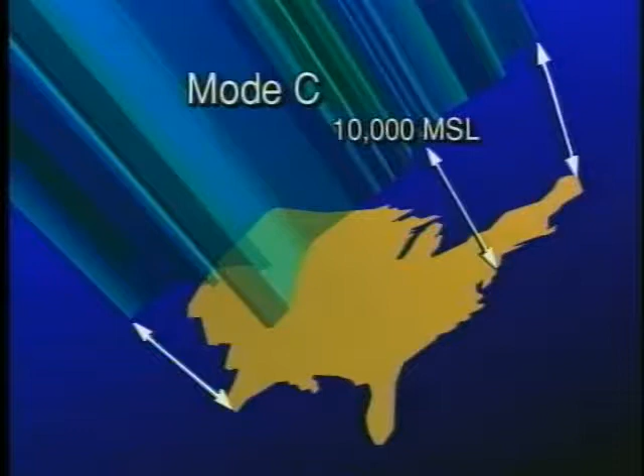You are also required to have a transponder with Mode C altitude encoding capability anytime you are flying at or above 10,000 feet mean sea level. This, however, excludes the airspace at and below 2,500 feet above ground level. The use of this equipment will be discussed in a later program.

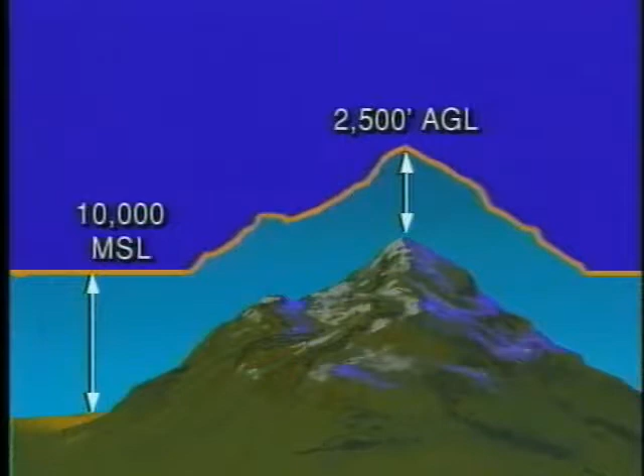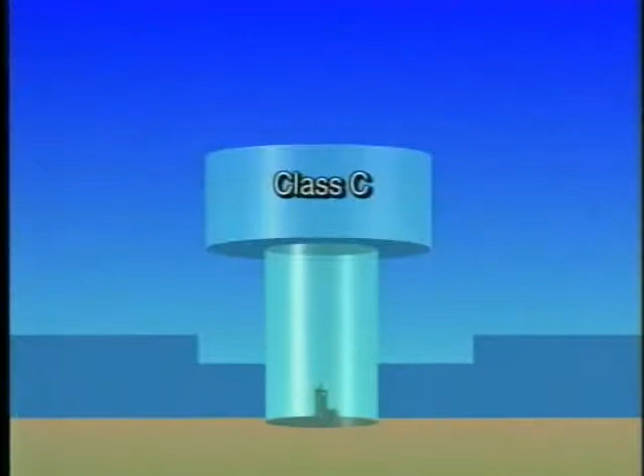Controlled and uncontrolled airspace is classified using alphabetical designations based on the standards set forth by the International Civil Aviation Organization, commonly referred to as ICAO. Controlled airspace consists of those areas designated as Class A, B, C, D, and E airspace. Uncontrolled airspace is designated as Class G. Currently, there isn't any airspace in the U.S. meeting the ICAO definition for Class F.

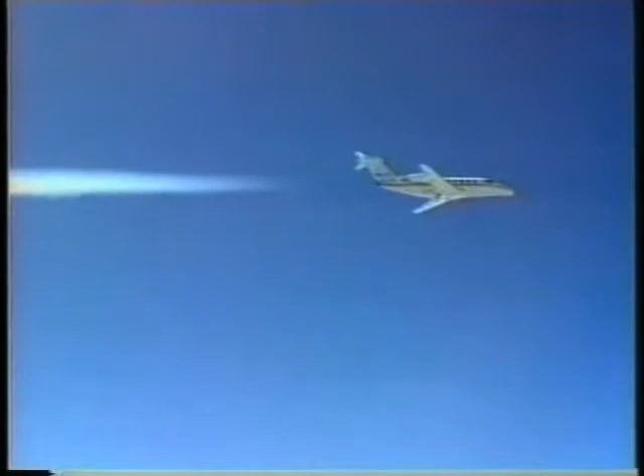The classification of airspace is relative to the complexity of the operational requirements placed on the pilot and aircraft. With this in mind, let's take a look at Class A airspace. Class A airspace extends from 18,000 feet MSL up to and including 60,000 feet MSL. To fly in Class A airspace, you must hold an instrument rating, operate under an IFR flight plan, and be controlled directly by ATC.

Now let's discuss the classes of airspace that you'll become familiar with while flying under visual flight rules. VFR sectional charts can be used to identify the various classes of airspace you will be flying in. The specific dimensions of most of the airspace classes are depicted on these charts.

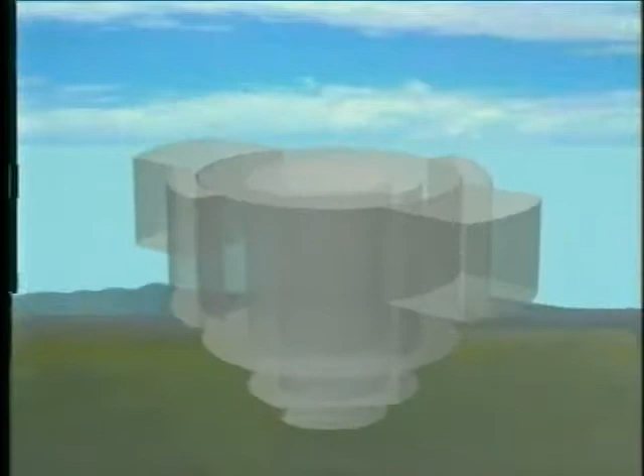Class B airspace surrounds our nation's busiest airports. In Class B airspace, radar services are provided by ATC to separate all arriving and departing traffic. Although the shape of Class B airspace may vary to meet the specific needs of each location, the general design is a series of expanding layers. This shape allows arriving and departing airplanes to remain in controlled airspace as they travel between the airport and en route portion of the flight.

To operate within Class B airspace, there are specific requirements that must be met. Prior to entering the airspace, you must get an authorization or clearance from ATC. This means your aircraft must be equipped with a two-way radio so you can communicate with ATC. In addition, your aircraft must have a transponder with Mode C altitude encoding capability. The transponder requirement extends out to 30 nautical miles from the primary airport and covers the airspace from the surface up to 10,000 feet MSL.

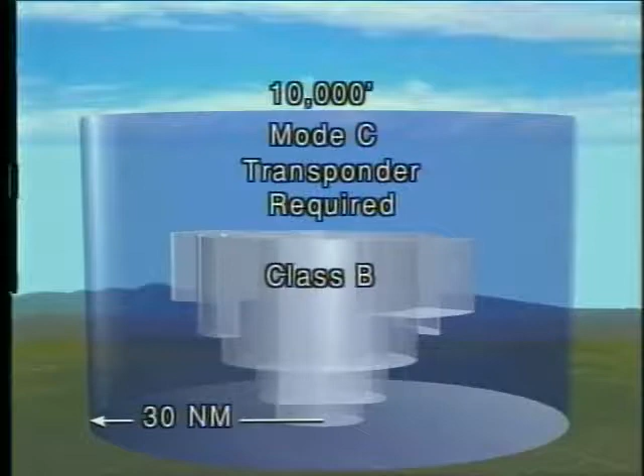To operate within Class B airspace, you must hold at least a private pilot certificate. There is, however, one exception to this regulation. Student pilots may operate within Class B airspace if they first comply with the training requirements listed in the regulations and have the appropriate instructor endorsement. Keep in mind that some Class B primary airports are so congested that takeoffs and landings by student pilots are prohibited. These airports are listed in FAR Part 91 and in the AIM.

Class C airspace exists at designated airports where the volume of traffic is not as great as in Class B airspace. But ATC does provide radar services to all aircraft.

This airspace usually consists of a core area or inner circle extending out 5 nautical miles from the primary airport, and a shelf area or outer circle with a 10-mile radius. The core area begins at the surface, while the shelf area starts at 1,200 feet AGL. Both have an upper limit of 4,000 feet above the airport elevation.

Prior to entering Class C airspace, you must establish two-way communications with ATC and maintain radio contact while in the airspace. Your aircraft must also be equipped with an operable transponder with Mode C capability. This requirement extends up to 10,000 feet MSL.

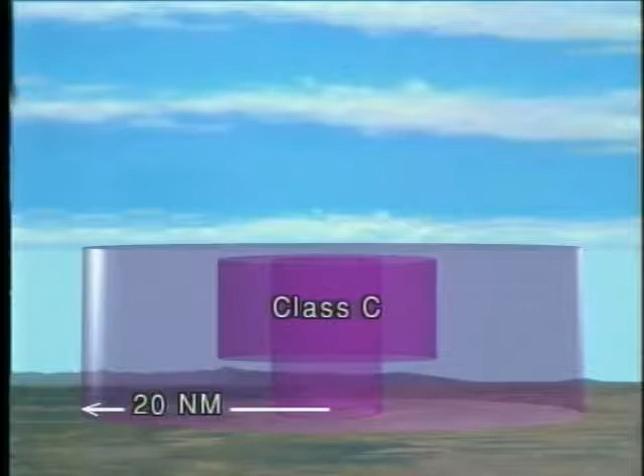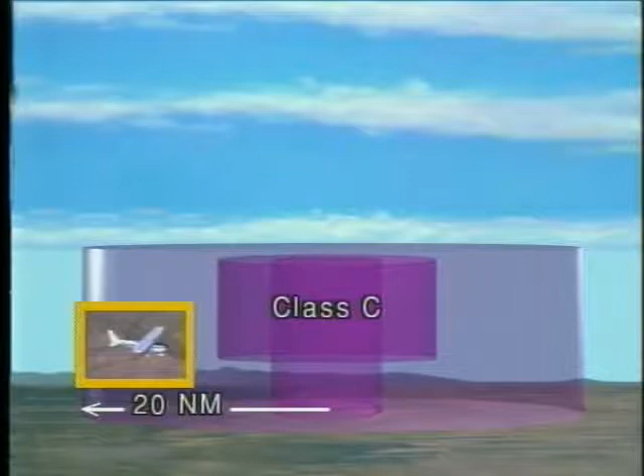An outer area exists out to 20 nautical miles from the primary airport in association with Class C airspace. Although two-way radio communications are not required, inbound VFR pilots are strongly encouraged to contact ATC when flying in the 20-mile outer area. ATC normally provides radar services in this area to improve safety and aircraft separation.

Another classification you need to know is Class D airspace. Class D airspace is located around airports that have operating control towers. The control tower provides air traffic control and weather reporting services to arriving and departing aircraft in the terminal area. The lateral dimensions of Class D airspace are normally based on the instrument approach procedures at the airport. Since this airspace often contains arrival extensions, the lateral limits vary from airport to airport.

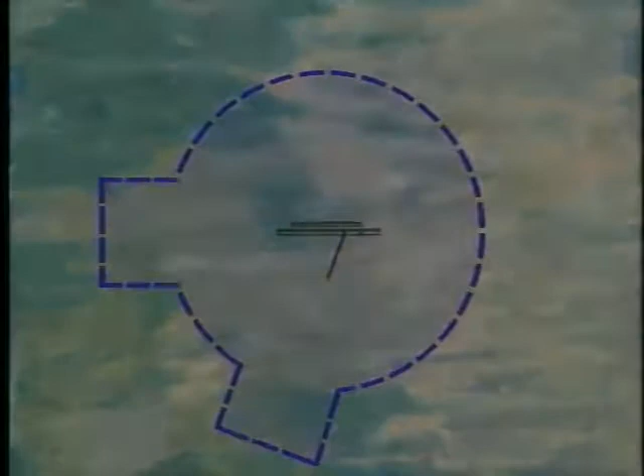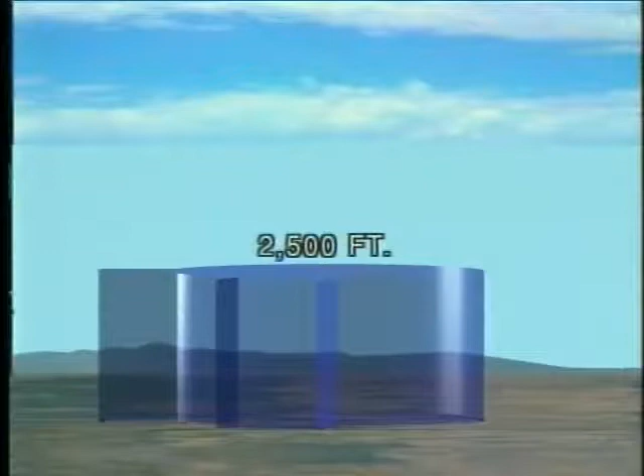Normally, the ceiling of Class D airspace is 2,500 feet above the airport elevation. The ceiling may vary, though, due to requirements unique to each airport. Prior to entering Class D airspace, you must establish and maintain two-way radio communications with the control tower.

At airports where the control tower is only operational at certain times, the airspace will be designated as Class D only when the tower is open. When the tower is not in operation, this area is referred to as Class E airspace. If there is no observer on the field to provide weather reporting service, the airspace will be designated as Class G. Two-way radio communications with ATC are not required in either Class E or Class G airspace for VFR flights.

However, in those Class E and Class G airspace areas which have an operating control tower, you must communicate with the tower when you are within 4 nautical miles and at or below 2,500 feet AGL. There are also some airports where the instrument arrival extension does not require establishing radio contact with the control tower. In this case, the extension area is designated as Class E airspace.

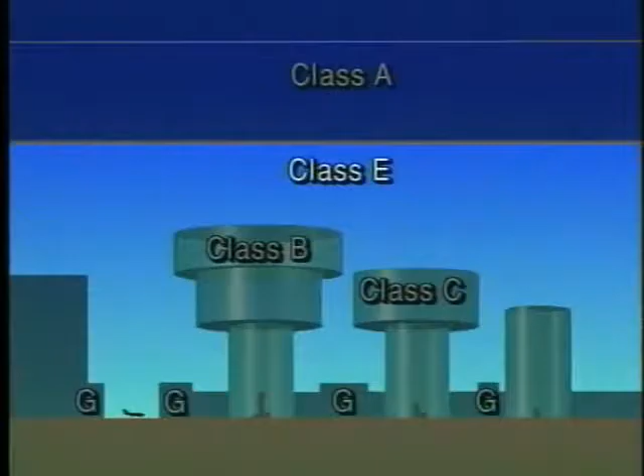The Class E designation also covers the remaining controlled airspace and consists of several different segments. ATC services are provided to IFR traffic in Class E, and some services are available on request for VFR flights. One segment of Class E airspace is found around non-towered airports which have approved instrument approach procedures. The purpose of this area is to allow IFR traffic to remain in controlled airspace while transitioning from the en route environment to the airport.

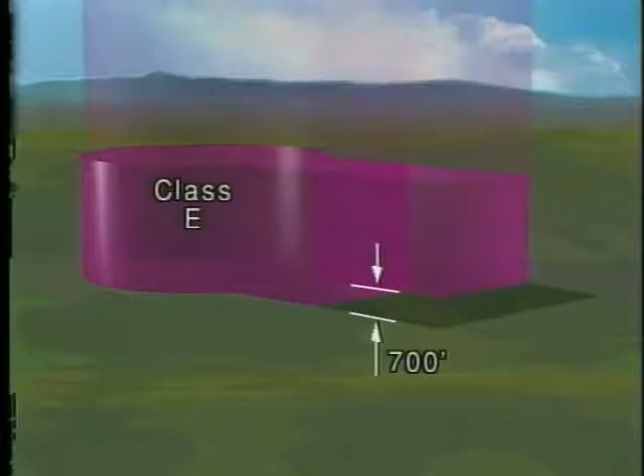The base of this type of Class E airspace begins either at the surface or at 700 feet AGL. The lateral limits may vary and are depicted on sectional charts. In both cases, the vertical limit extends upward to the base of the overlying airspace. At airports where Class E airspace begins at the surface, weather reporting services are provided by an FAA-designated weather observer. At certain times, this service may not be available, and the airspace will then be designated as Class G.

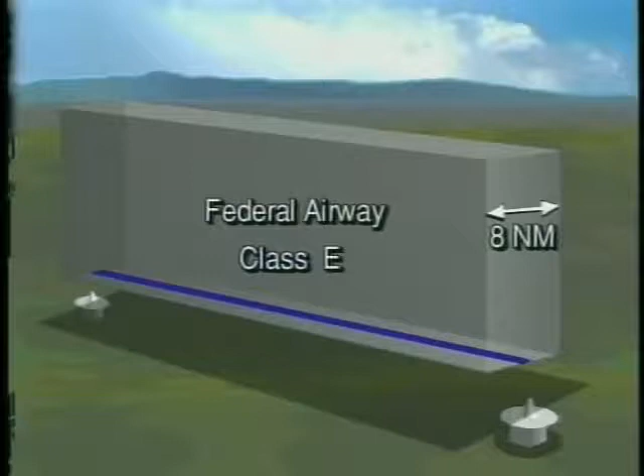Away from airports, much of the Class E airspace begins at 1,200 feet AGL, and most of your flights will be conducted in this airspace. Federal Airways, also known as Victor Airways, are designated as Class E airspace. These airways allow you to fly from one location to another by radio navigation. These airways are normally 8 nautical miles wide and begin at 1,200 feet AGL. The low-altitude airway system includes the airspace up to, but not including, 18,000 feet MSL.

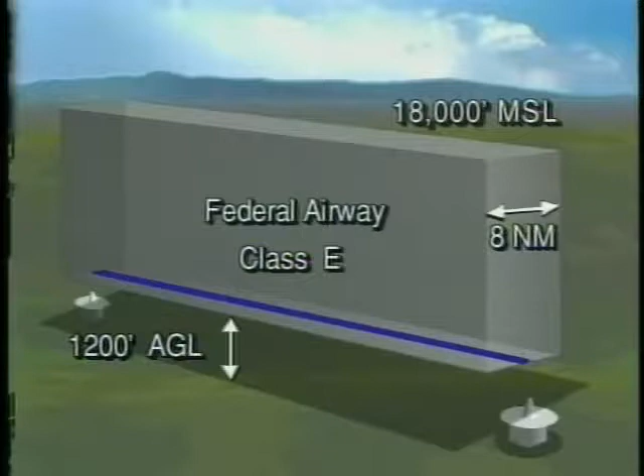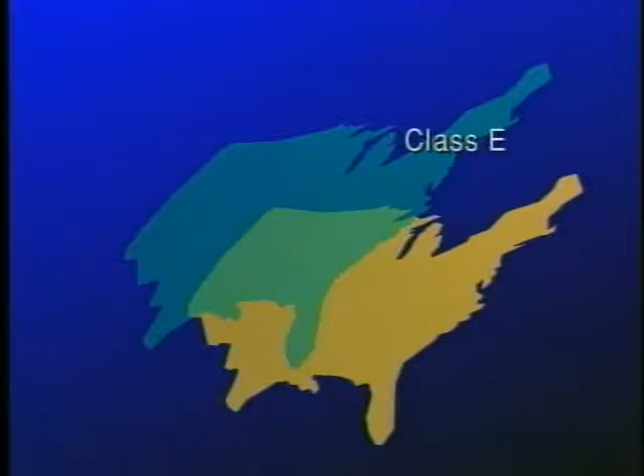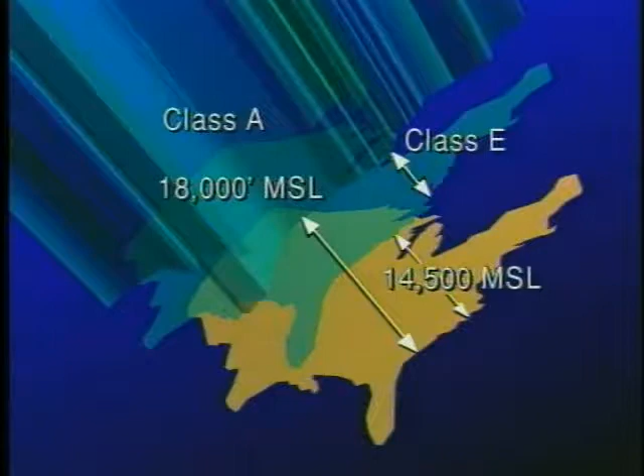Unless designated at a lower altitude, Class E airspace also covers the 48 contiguous states, the District of Columbia, and a portion of Alaska, beginning at 14,500 feet MSL and ending at the base of Class A airspace. It does not, however, include the airspace within 1,500 feet of the surface.

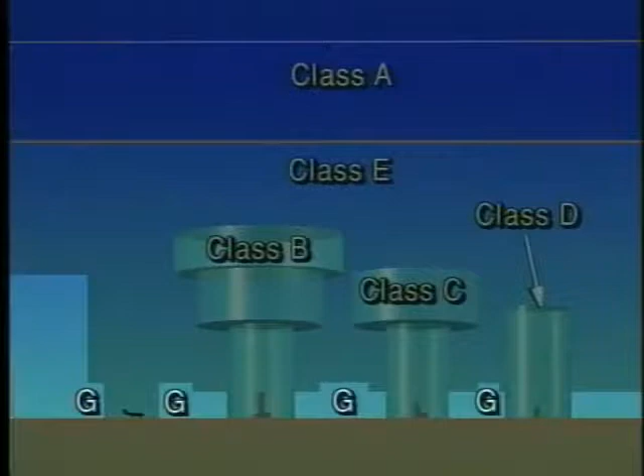The last letter designation for U.S. airspace is Class G, or uncontrolled airspace. Essentially, all airspace not designated as Class A, B, C, D, or E is uncontrolled. ATC doesn't have any responsibility or authority for aircraft operations in Class G airspace, and unless the area contains an operating control tower, there are no two-way radio communications or special equipment requirements.

Although some segments of airspace we have discussed do not require communication or special equipment, it is still important to know their dimensions because of required weather minimums. Specific cloud clearance and visibility minimums have been established for VFR flights in both controlled and uncontrolled airspace classes. Let's take a look at controlled airspace weather minimums first.

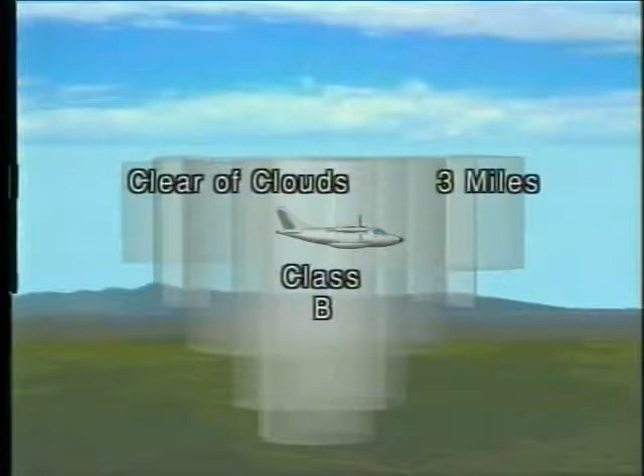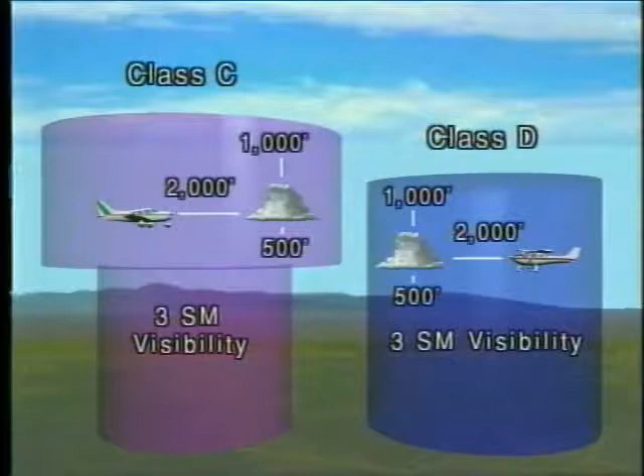To operate VFR in Class B airspace, you must remain clear of clouds and maintain at least 3 statute miles flight visibility. You must also maintain 3 statute miles visibility in Class C and D airspace, but the cloud clearance increases to 500 feet below, 1,000 feet above, and 2,000 feet horizontally. These same minimums apply in Class E airspace below 10,000 feet MSL.

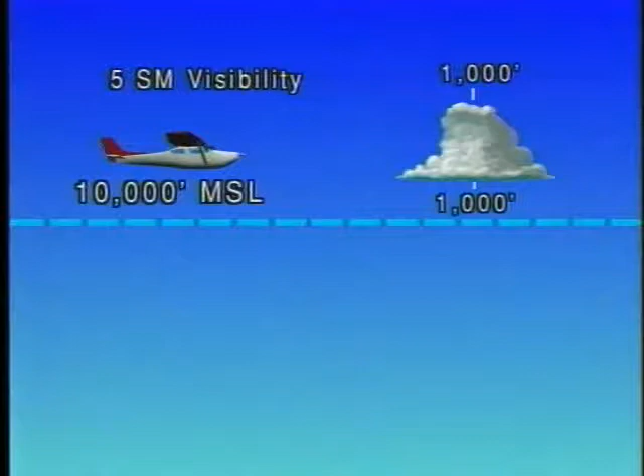In Class E airspace above 10,000 feet MSL, though, the minimums increase. You must maintain 5 statute miles flight visibility and maintain a distance from clouds of 1,000 feet below, 1,000 feet above, and 1 statute mile horizontally.

Besides the basic VFR weather minimums, there are additional limitations when operating in the vicinity of an airport in controlled airspace. For example, to operate VFR beneath a ceiling within the lateral boundaries of controlled airspace, which extends to the surface, the ceiling must be at least 1,000 feet.

In addition, within the lateral boundaries of the surface areas of Class B, C, D, and E airspace, VFR pilots cannot land, take off, or enter an airport's traffic pattern unless the visibility is 3 statute miles or better. These requirements give VFR and IFR pilots the necessary visibility to see and avoid each other during approaches and departures.

When the weather is below these VFR minimums, you may be able to obtain a special VFR clearance from ATC. This type of clearance allows you to take off and land as long as you have 1 mile visibility and can remain clear of clouds. Keep in mind, a special VFR clearance cannot be issued at night unless you have a current instrument rating and your airplane is equipped for instrument flight.

In addition, special VFR clearances are not issued to fixed-wing aircraft during the day or night at some of the nation's busier airports. A listing of these airports can be found in FAR Part 91.

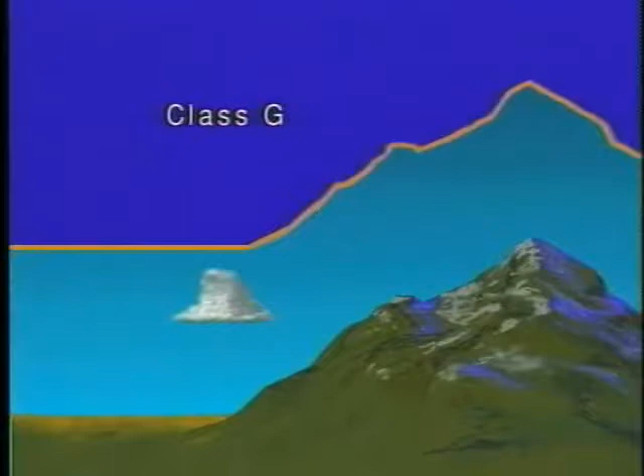The lowest weather minimums occur in Class G, uncontrolled airspace, during the day. When flying at or below 1,200 feet AGL, regardless of your MSL altitude, you must maintain a flight visibility of 1 statute mile and remain clear of clouds.

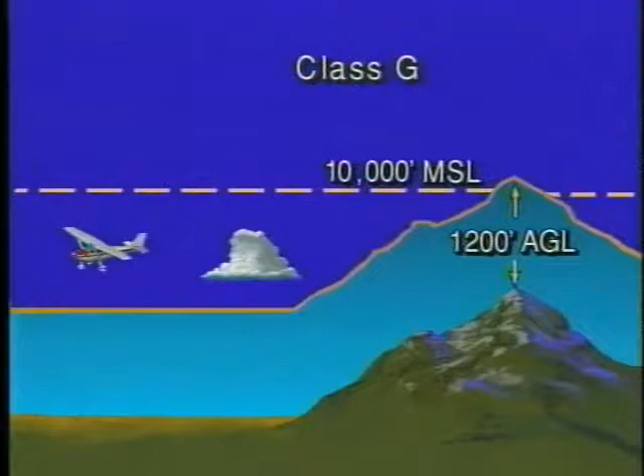During the day, when flying higher than 1,200 feet AGL, but less than 10,000 feet MSL in Class G airspace, the flight visibility remains at 1 statute mile. The cloud clearance increases, though, to 500 feet below, 1,000 feet above, and 2,000 feet horizontally.

At night, in Class G airspace, the same cloud clearance minimums apply, but the visibility increases to 3 statute miles below 10,000 feet MSL. These same minimums also apply to any airspace above 10,000 feet that is within 1,200 feet AGL. There is one exception to these weather minimums in Class G airspace. You may operate an airplane in the traffic pattern at night with a minimum visibility of 1 statute mile. However, you must remain clear of clouds and stay within 1/2 mile of the runway.

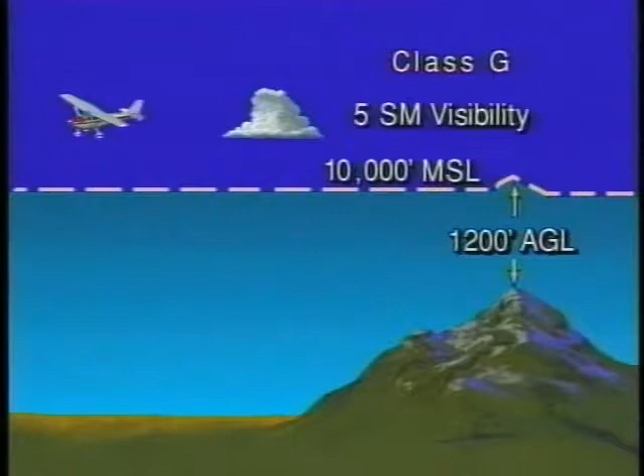Finally, if you are operating more than 1,200 feet AGL and you are at or above 10,000 feet MSL in Class G airspace, your weather minimums increase. Here, you are required to maintain 5 statute miles flight visibility and remain 1,000 feet below, 1,000 feet above, and 1 statute mile horizontally from clouds.

Airspeed restrictions have also been established for operations in both controlled and uncontrolled airspace. Unless otherwise authorized, you cannot operate an aircraft faster than 250 knots when below 10,000 feet MSL, regardless of the type of airspace. When operating below 2,500 feet AGL and within 4 nautical miles of the primary airport of a Class C or D airspace area, the maximum airspeed decreases to 200 knots.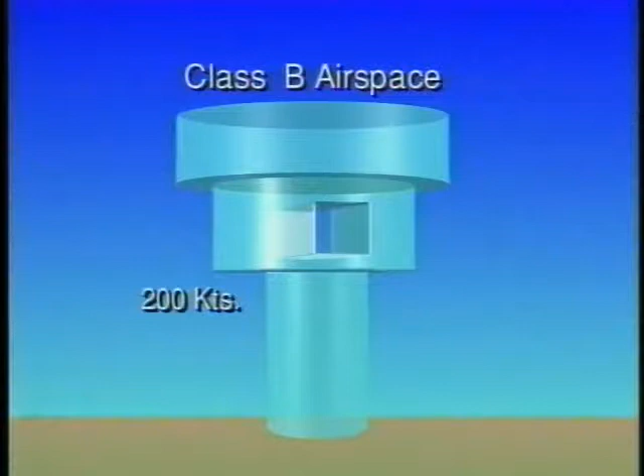This 200-knot limitation also applies to aircraft operating in the airspace below the lateral limits of Class B airspace and in a VFR corridor designated through such airspace.

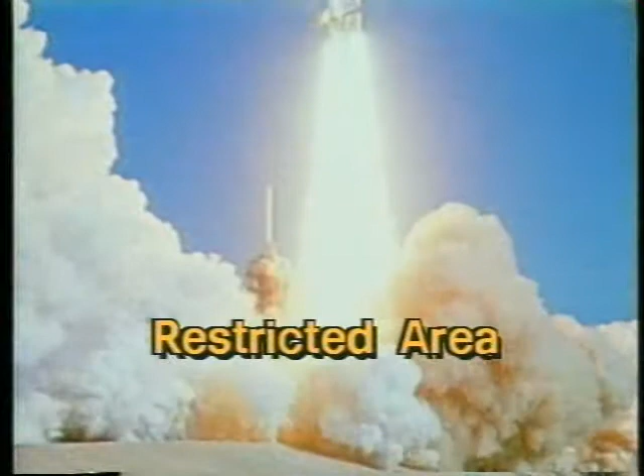Another major classification of airspace is called special use. You are required to either avoid these areas or to abide by certain limitations within them. For example, flight within prohibited areas is not allowed because of national security or other national welfare reasons. In contrast, flight within a restricted area is not prohibited, although certain limitations may be imposed due to hazards in the area. To fly through this area, you must receive authorization from the restricted area's controlling agency.

Warning areas are over coastal and international waters and cannot be designated as restricted. However, the activities within these areas may be as hazardous as restricted areas. Military operations areas are blocks of airspace in which military training or other military maneuvers are conducted. VFR pilots should exercise extreme caution when flying within an active MOA.

An alert area usually contains a high volume of pilot training or an unusual type of aerial activity. Flight within alert areas is not restricted, but you are urged to exercise extreme caution and watch for other traffic. Controlled firing areas contain activities which, if not conducted in a controlled environment, could be hazardous to non-participating aircraft. However, when a non-participating aircraft is spotted approaching the area, all activities are suspended.

The final grouping we will look at is designated as other airspace areas. The first type of airspace that falls under this classification is called an airport advisory area. There are 3 different types of advisory service available at select airports. The FSS provides a local airport advisory, or LAA, service to all participating aircraft within a 10 statute mile radius at airports that have a flight service station but don't have an operating control tower.